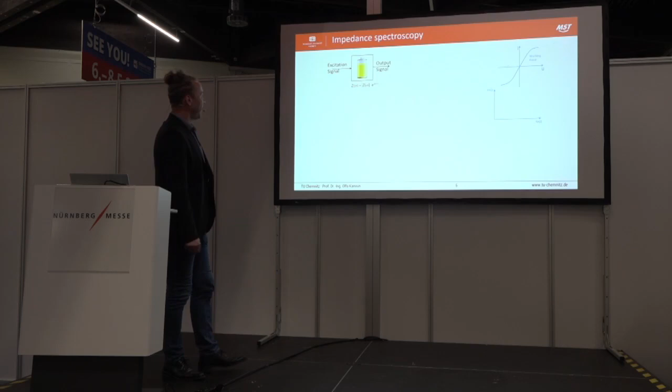So, first of all, so that you get a better picture of what we did, I'd like to explain a little bit the idea of impedance spectroscopy and what embedded impedance spectroscopy means. And now, a short lecture - I apologize.

Impedance spectroscopy means I need an excitation signal, in a standard way a sinusoidal signal. I apply this excitation signal to a device under test - in that case, I choose the battery as the device under test. The excitation signal is applied to the device under test, and I get a certain output signal.

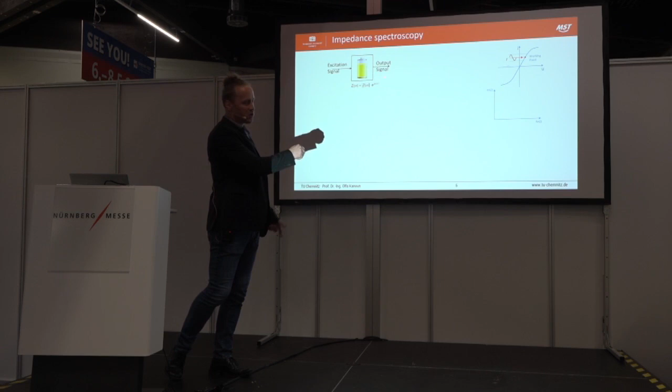Here in the IU curve, you see the excitation signal applied at a certain working point, a state of charge of this battery, and you get a corresponding response, a reaction from your system. This reaction you can calculate to one point in the Nyquist diagram. You see the real part and the imaginary part of impedance, and this is, at the end, one frequency measurement.

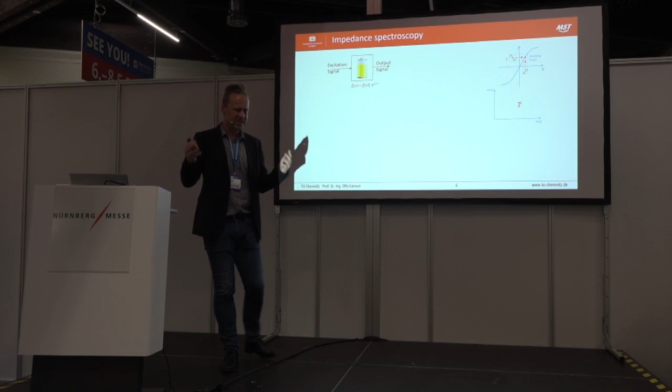This describes almost the state of the art of impedimetric sensors. If you take a look, eddy current sensors, capacitive sensors, ultrasonic sensors - all these sensors almost work with one dedicated frequency. From the point of view of fundamentals of measurement, which we teach to our students, if you use a second frequency, you increase the robustness of your measurement a lot. So like this, we use a lot of frequencies.

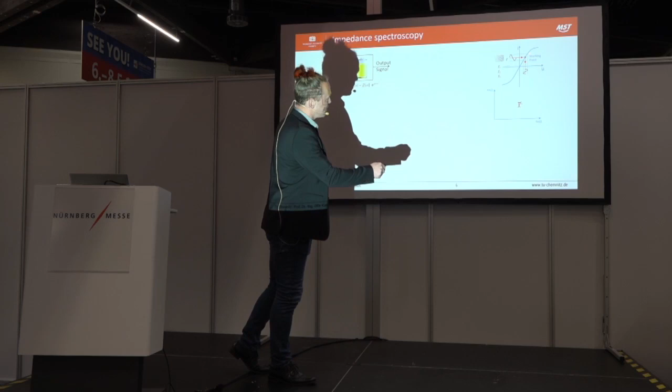You see here a so-called sweep from a low frequency to a higher frequency. We apply a sweep of excitation signal to this working point, and for sure we get also a certain response depending on the behavior of your system. This becomes more clear a little bit further.

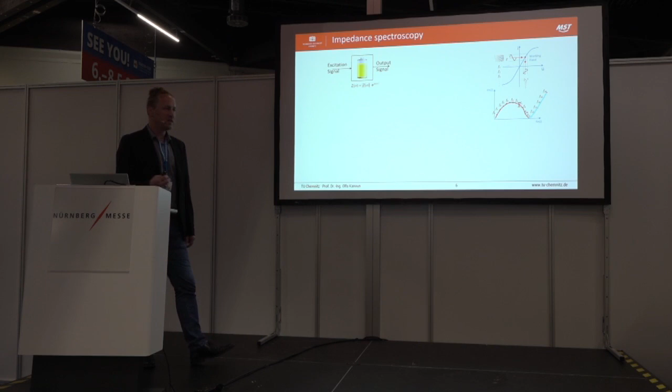Each system has a typical characteristic, and so the problem is to design an adapted excitation signal for a dedicated system to get a characteristic curve like this, for example, for a lithium-ion battery. This is, at the end, also our advantage, our skill in our team. Our idea is to get as good an understanding as possible of what happens, especially in these frequency ranges. I guess later on this aspect will become more clear.

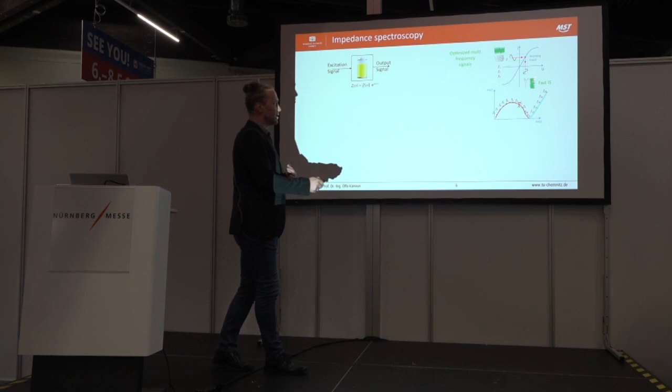If you take a look, you have here now a sweep of a sinusoidal signal. You put one frequency after another, so you have a long measurement time. For fast impedance spectroscopy, there are a lot of opportunities, a lot of approaches to reduce the measurement time. Here, only one example: multi-sine. You see here two periods of the smallest frequency, the longest period duration, and we put all the other frequencies into this time window. We apply, at the end, a multi-sine signal, and it is possible, using signal processing, to analyze each frequency point separately.

The advantages: it is a non-invasive approach. We apply this for resistive, capacitive, or even inductive solutions, sensor principles. Another benefit is the separation of effects in specific frequency ranges.

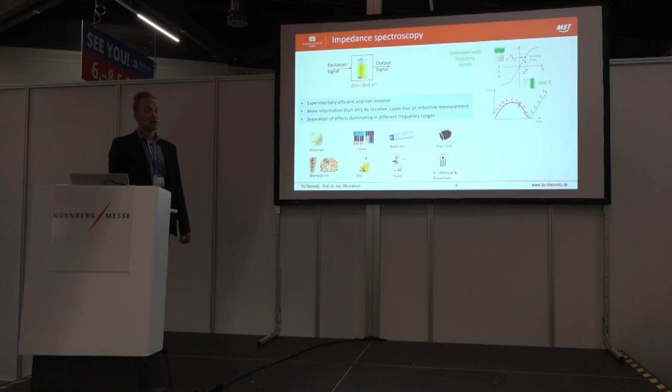A collection of our approaches: we were able to characterize materials like metals. Therefore, we are using almost inductive sensors, eddy current sensors - we call it inductive spectroscopy. We developed an approach for cable diagnosis, as well-known also for batteries and fuel cells. For biomedicine, we developed approaches in the food branch, oil or milk, where we apply capacitive spectroscopy. At the end, we use capacitive sensors, applying multispectral excitation to get more information out of the system, out of the measurement, in comparison to state of the art. The idea is to get this principle, this technique, into an embedded system for a stable, affordable, embedded impedance spectroscopy.

But what does it mean, understanding of impedance spectra? You see here once again, qualitatively, this curve, this Nyquist diagram from the slide before. This is a typical shape, qualitative, and we start here in this part in the range of millihertz.

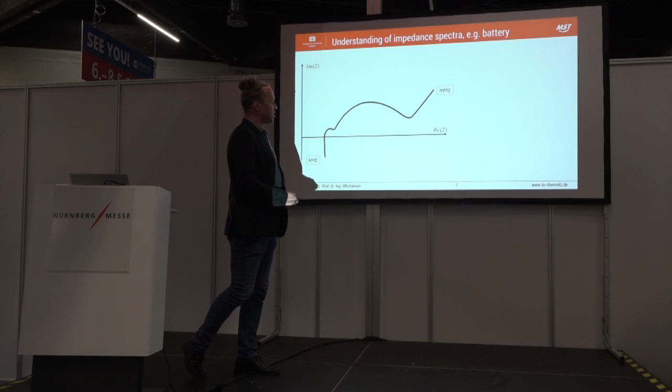Batteries - this is an electrochemical system. The effects, the phenomena, are slow. You have ionic charge transfer. That's why you need low frequencies to analyze this range, these phenomena.

We start here - this is a so-called RS point, the shift of the real part. This is not so very important, but it is an important method in the state of the art for battery diagnosis, the 1kHz method. But honestly spoken, without any real sense.

So we have here this diffusion part, as I said. This is coming from the electrochemistry field, well described in this area. We use this information to model this area, where we describe almost electrochemical phenomena, electrochemical aspects in the battery.

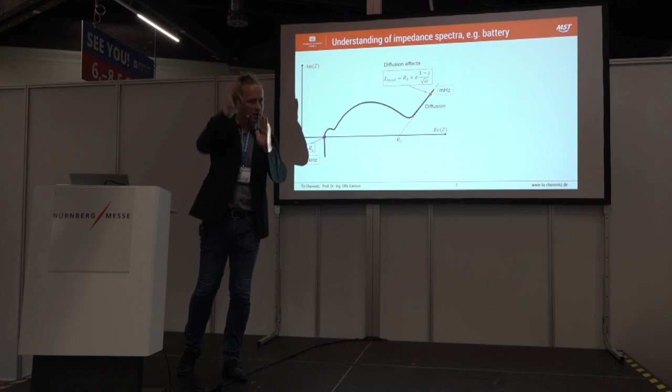You need to understand, we have this excitation signal, a low frequency. At the end, it's a polarization of the molecules from the electrolyte. But the electrolyte molecules are very huge, and if you increase the frequency, the heavy weight of these molecules is too much for them to follow anymore the polarization, the excitation. That's why this phenomenon drops out of the contribution to the measured signal. And this is this point.

From this point, another phenomenon becomes obvious. You see here in this area there is a semicircle present, and this describes almost the characteristic of electrode 2. In this area, there's also the so-called charge transfer reaction active.

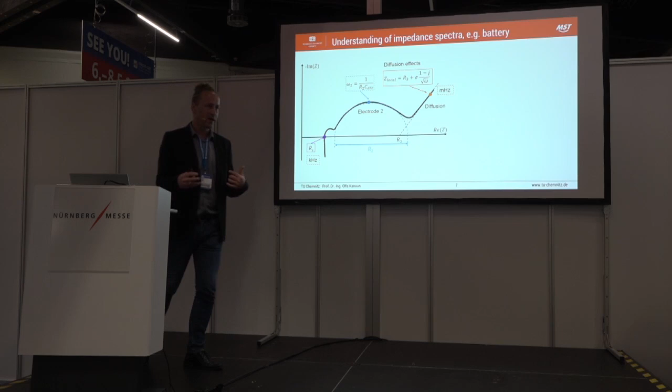I continue. There is a small semicircle. This is electrode 1. Also, delamination phenomena can be monitored in this area. And then there is a small inductive area up to a small kilohertz range.

This inductive part is almost important for fast charging aspects. If you like to design a battery management system for such purposes, it is important to know the inductance of your system.

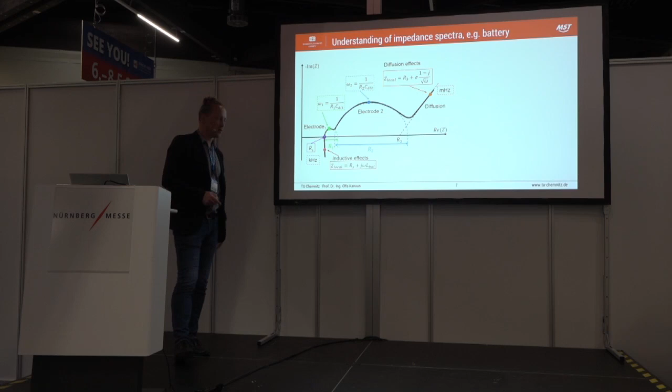Our idea is to get real measurements, to get understanding of the working phenomena in this area, and to organize a certain modeling in such fields.

Generally, we can distinguish between two modes. I divide a qualitative understanding - it's at the end, it changes from a certain state. If you have, for example, a good example in your production, you measure a curve, and this is your best pattern. And then, if you continue in the production and you have any kind of a failure in your system, you have a change in this shape. And this is, in our talk, a qualitative mode.

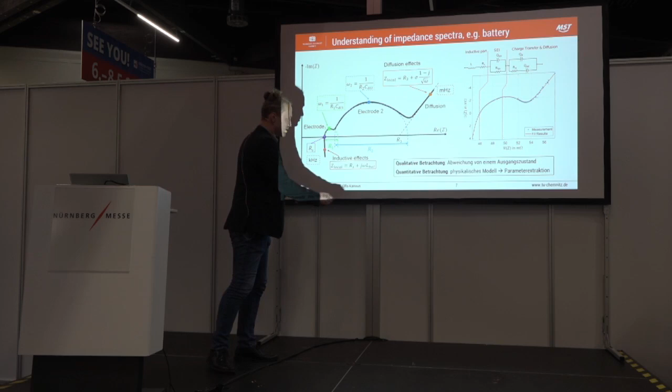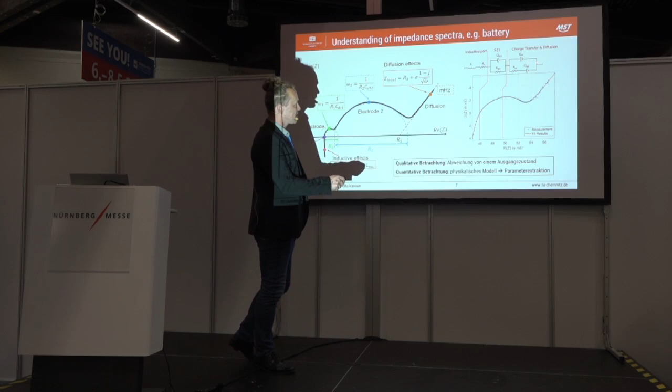A quantitative mode needs a little bit more effort in the lab. We need a better understanding, and we need to generate a certain electrochemical, physical model which describes this characteristic. And if we have such a model, then it is possible to extract really physical aspects or phenomena which we are changing in the procedure. But I guess you will understand later a bit more.

This is a very important diagram for our team. You see here an x-axis, this is a frequency range. You see the decades, 10⁻⁴ up to 10⁶. And here you see the impedance range from also 10⁻⁴ to 10⁶. This is almost a range of practical applications, and you see here the field for batteries, for example.

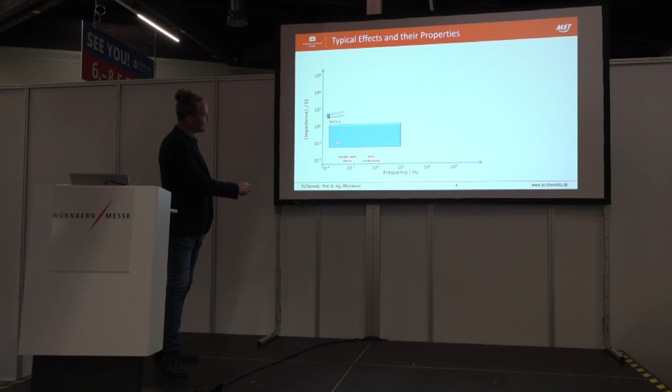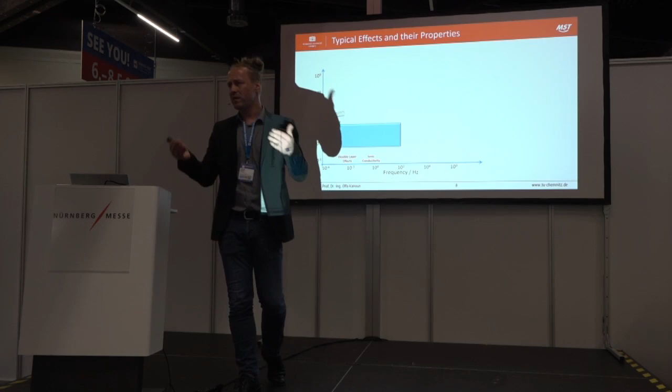You have a range from 10⁻⁴ up to 10³, so you have a small kilohertz range where we test the battery systems, and you get output impedances in the range up to ohms. As you know, lithium-ion batteries have an inner resistance of some milliohms, and we don't need a system with a resolution of kiloohms. Does not make sense.

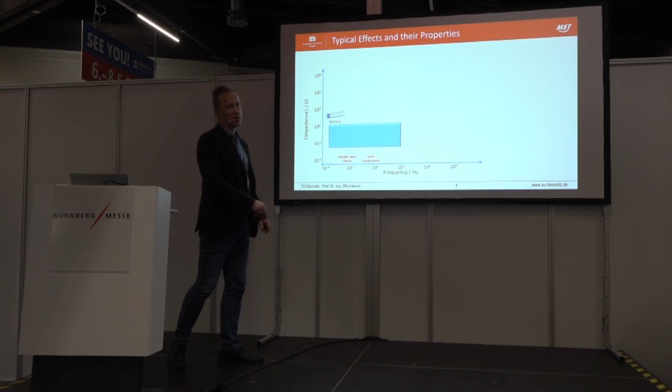So, which effects are working? We have here double layer effects in the region 10⁻³, and we have ionic conductivity in the range of hertz. So this is only an example, I don't like to continue with each phenomenon.

This is our magic diagram, and each application we put always here into this field. Let me make it short: we have here effects, we have here our coil structures, the inductive spectroscopy in this range.

Here we are using the eddy current effect or the Maxwell-Wagner effect. In the range of 10⁷, we have almost active water molecules. If you have, for example, absorption of water in polymers, in wood, in whatever, then we need a test in the field of 10⁷.

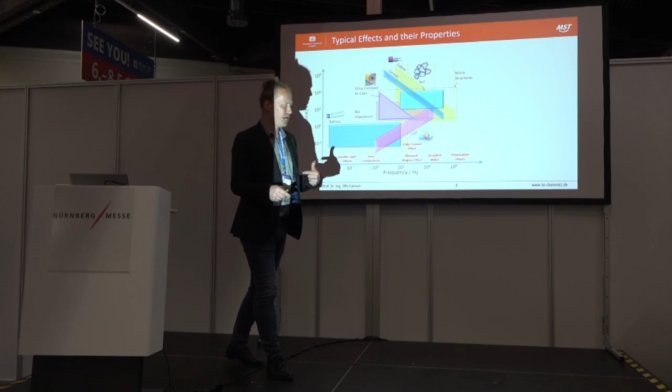So here in this area, microstructures, 10⁹ polarization effects - this is something we are currently more concentrated on. Our idea is to identify polymer types, and there we need to go down into the molecular level, and there we use polarization effects from polymer molecules, and there we need to go up to the gigahertz range.

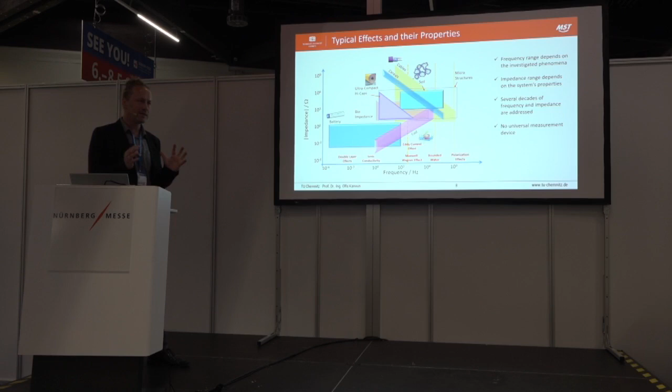So here you got a clue what it means to have frequency-dependent effects or phenomena. These are very important for us. At the end, our strength or our idea is always to make an impedance measurement and to get a certain understanding of what happened, so the idea is to get a physical or electrochemical model.

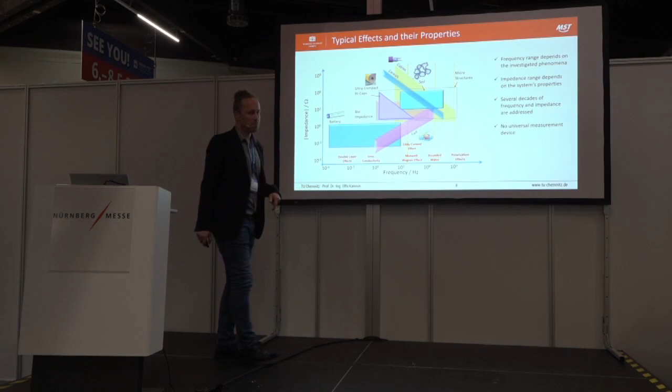And for sure, to make the story short, no universal measurement device is able to cover this complete range. This is too much for one approach, and this is also a challenge we are faced with. As I said, for us, embedded system design is important, and therefore you need to keep this part in your mind.

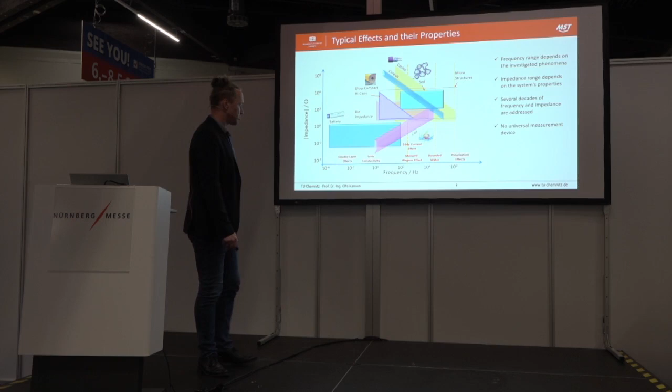Once again, impedance spectroscopy in the lab - this is something you can go in a shop and buy devices. Keysight, you can take 60, 70 kilo euros, 70,000 euros, and you can buy an impedance analyzer. But I'm sure you don't want to put this device in your production line.

A next step is National Instruments hardware. It's possible to apply impedance spectroscopy also with such components. You can use the parts, the components - you can do it, it's possible.

But at least if you need to multiply and need the second and third license, this also is not so funny. That's why the solution is we need to develop embedded solutions: small circuits, cheap, robust, and fully automated.

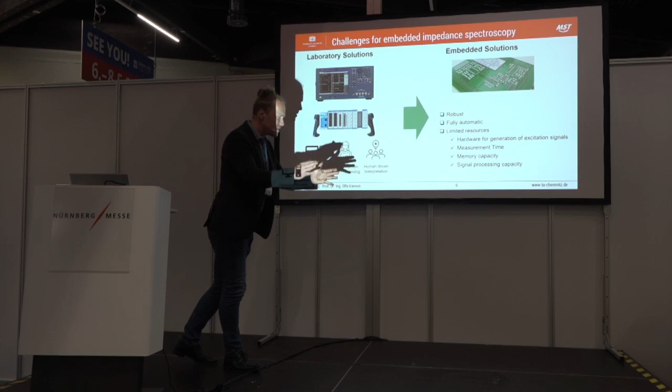But I need to say, limited resources. Yeah, you always have limited resources, you don't have the full performance. But do you need it? You need to take a look into your production process and identify the important points. Then you can reduce your measurements to only a small frequency range, or even just some frequency points, to get sufficient information from the procedure in the embedded approach.

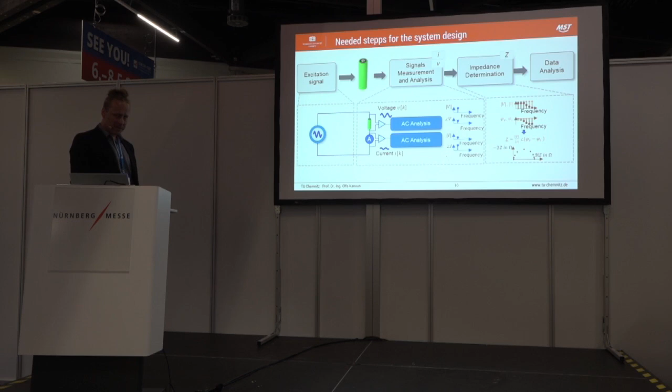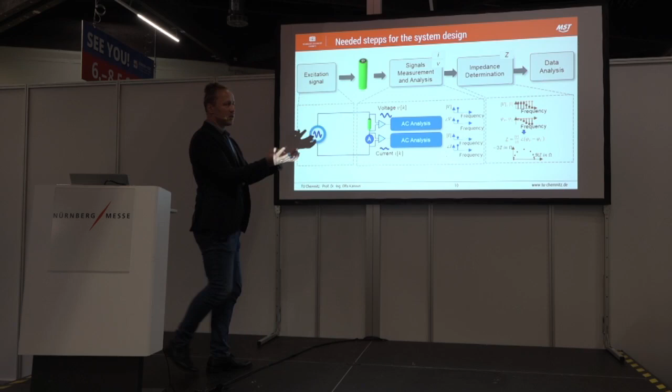And this is, at the end, a final overview from theory. What does it mean at the end? Impedance spectroscopy is a complete story. You need a dedicated, synthesized excitation signal for your particular approach. You need to measure the voltage and current signals, and this is important in phase - you cannot measure sequentially with a multiplexer. It is possible, but you have problems with the phase at the end in the analysis. You need the impedance determination, and these parts are almost combined in the embedded system, while the data analysis should be done somewhere in a cloud, or wherever, in an addition part upstairs.

Let me say it in that way. So now I come to this - I call it philosophy - to get a better picture from your manufacturing processes.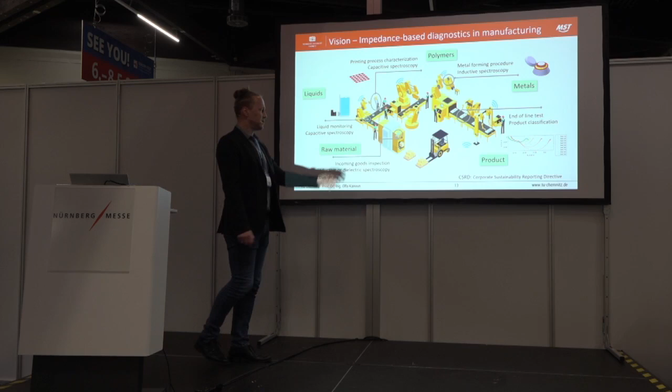We're going stepwise: characterization of raw materials and incoming goods. What does it mean, how does it work until now? You are a company, you need a certain supplier chain. You go to your supplier and say, I need a product, XY, this is my specification. Can you deliver? Yes or no. If yes, everything is fine. If no, then you go to the next. So you have a quite tight band of tolerances for your incoming goods.

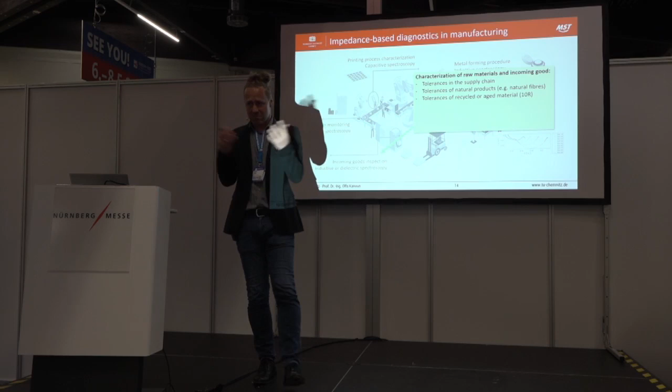But what will come soon? You have tolerances in the supplier chain because of availability. You know the complications in global infrastructure - you need to go to a different supplier, and they cannot give you the same tolerances. What do you do? Do you stop your production or adjust your processes? You have tolerances in the supplier chain, and also tolerances because of the idea to use natural products. If you like to substitute your polymer with, for example, natural fibers, you won't have these stable parameters anymore.

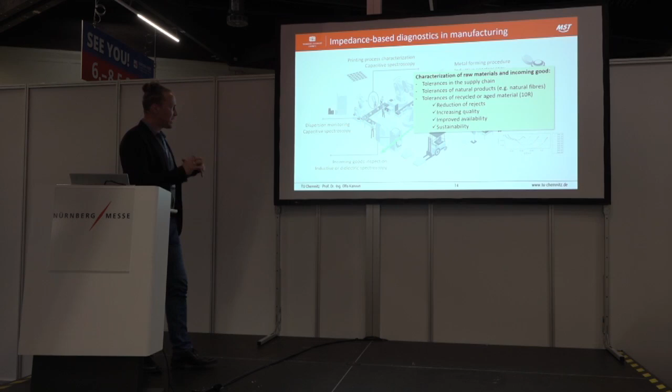This is sure. And also the question of recycling - you get much more problems because of aged, or still-in-use aged, material. There are a lot of investigations in that field, but this will come soon. To increase sustainability, reduction of rejects - these are the questions. Increase of quality, or keeping the quality of your products. Improved availability - this is almost the story with the supplier chain, if you don't have the need to go to only one supplier. At the end, all these aspects help to increase the sustainability at the input of your production.

In that case, let me place an example from our research. I want to continue here: dispersion monitoring, capacitive spectroscopy. If you are dealing with liquids, as you remember my diagram, we were dealing almost with capacitive spectroscopy. What can we do? We can, for sure, measure filling level, but we can also characterize liquids.

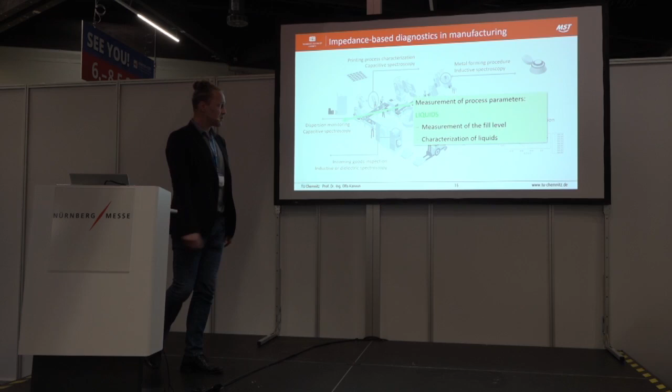We have a team also developing soft sensors, published in 2022. We try to organize dispersions, including nanoparticles. Here you see almost the biggest problem: you have the CNT, the carbon nanotube for example, and it likes to stick - there are van der Waals forces. That's why this material likes to conglomerate, as shown here. But this is an unwanted problem for the production of, or for whatever you want to do with, this polymer.

Some aspects are quite fundamental, but we do soft sensors here. You can see our startup in Hall 1.

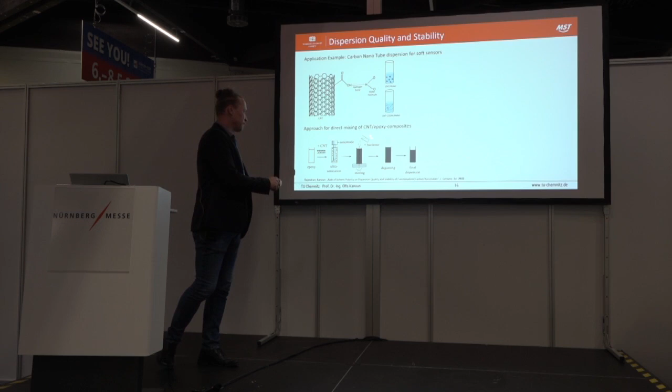Here you can see the mixing process in an epoxy dispersion. We bring epoxy into a solvent, we have a dispersion, and we mix it with carbon nanotubes. If you put it in first, it looks like this: you have sedimentation, different phases, no homogeneous dispersion. We need some time to develop procedures for different polymer types, always dedicated procedures including ultrasonication, stirring, and heating to unbundle the CNTs.

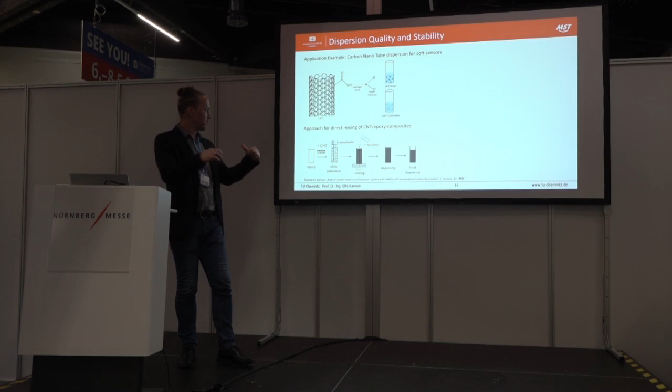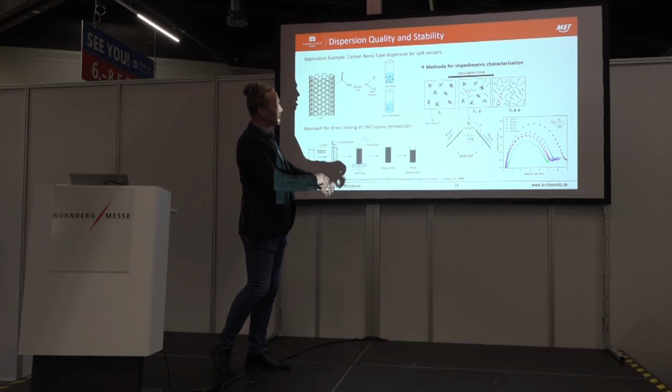So what does it mean? We have here the conglomerates, and by sonication time we get an unbundling of the CNTs. The final goal is a homogeneous distribution of the CNTs in the dispersion. The problem is, if you continue with sonication, the CNT breaks, and this is an unwanted phenomenon if the CNTs become shortened. We want the CNTs in their original length.

So we are able to monitor this with impedance spectroscopy. You can see here a corresponding model. This is a procedure we understand well, ready for industrialization. As I said, published in 2022, and we have a startup here in Hall 1.

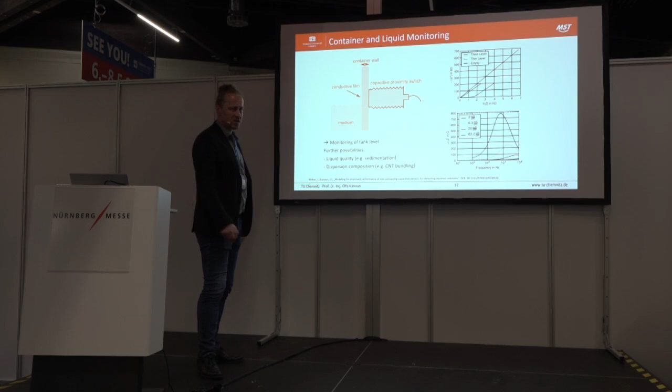Further possibilities include liquid quality monitoring, as I said. Let's think about the production process: you have your production line, and a tank with ink or glue, for example. You don't need a lot in your process, and this tank sits there for one week or one month. Maybe you have sedimentation, drying procedures, and so on. We can support this by observing it with impedance spectroscopy to make the procedure more stable.

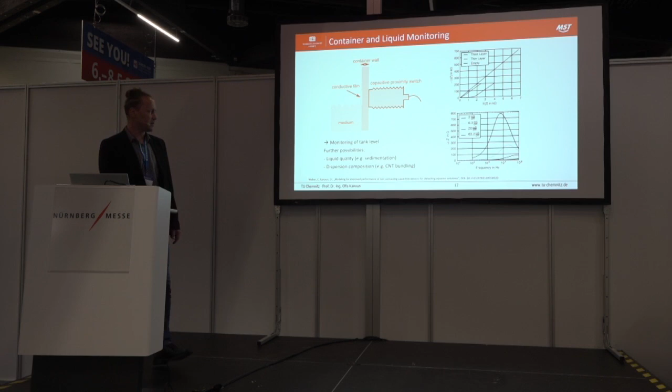Coming to the next stage, polymers. In the field of polymers we also use impedance spectroscopy. What does it mean? Here I choose an example from a production process of printed batteries. You have a pattern printing process, a huge substrate with multiple pads printed in a matrix, in sequence. You have a first printing process, and after a while, after a drying procedure, after evaporation or formation, you have a second procedure.

I am sure that still in the first step, the quality of the final product will be defined. And I am sure you have in this matrix one or two or three parts which are rejects from the beginning, from the first procedure.

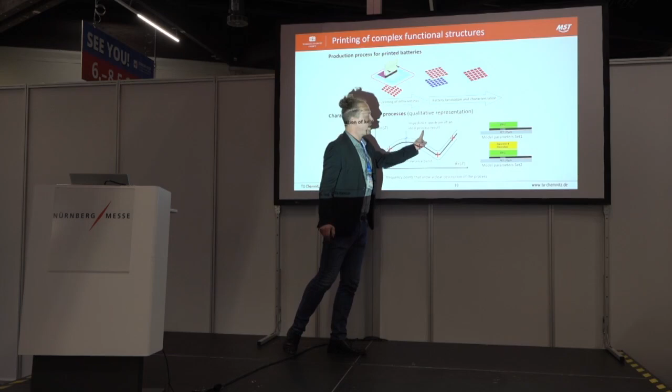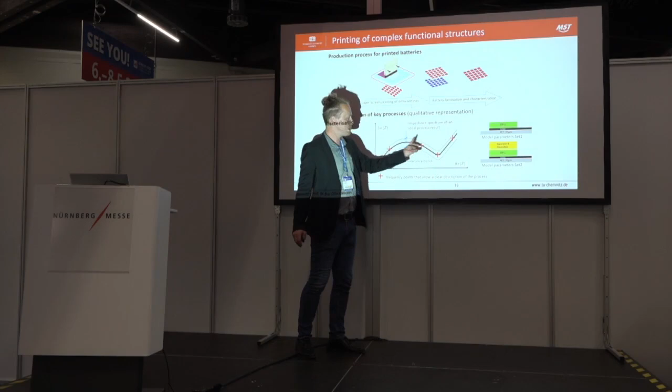What you can see here is only a qualitative drawing, the pattern of the battery diagram. You can measure in the lab the spectra of an ideal process result. You get from the company an ideal process result, you make the impedance measurement, you have this in your system, and you have a model parameter set 1 for the first layer.

So how it works at the end is not yet clear, whether this is included in the nozzle from the printing head, or if it is something like a mask which you put on it after the printing procedure. This is not yet clear; it depends on the application.

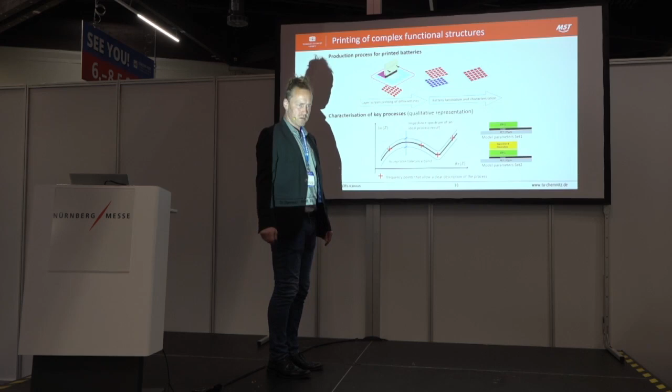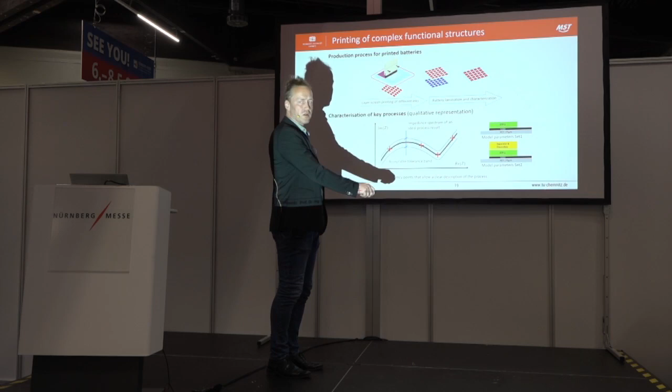What is also possible? After a while you have a second printing procedure. You take the same application, the same sensor system, the embedded system for impedance spectroscopy, the same front end, a capacitive structure, and you select in the microcontroller only the second model set for this double layer structure. For sure, this double layer structure you characterize in the same way in the lab before, so you are able to analyze.

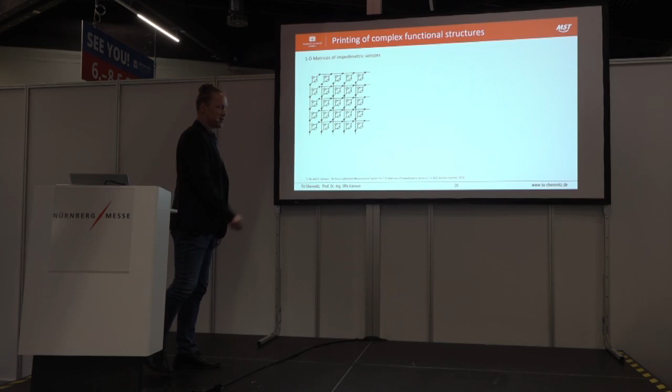I don't want to do that with each step, but with the key steps, the important ones. At the end, we have such a matrix. It is published in 2024. We are able to analyze impedimetric matrix systems. I don't want to come in detail here, but we can do that.

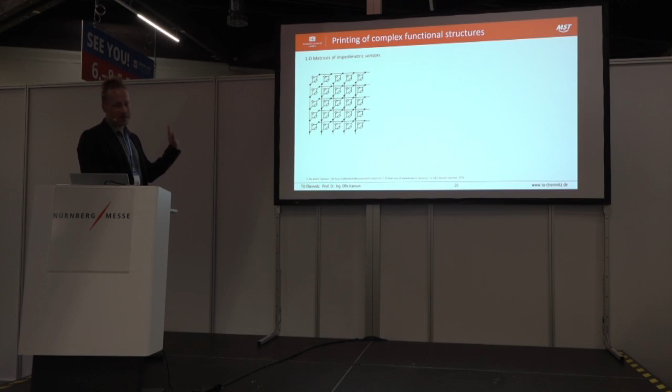What is the idea? We have here our impedance-based measurement. We are able to measure each of this matrix element in a way that we can say, okay, this and this is okay, and the fourth in this line has any kind of a problem. And my system maybe can adjust process parameters. Maybe here you see the yellow arc, it's maybe in the range of the tolerance band. So here you can adjust the parameters, and this you exclude from the further production steps.

Embedded systems for impedance measurement in matrix structures. We start in this year with a project. We develop this with a company doing printed batteries in our town.

Okay, what else can we do? Identification of percolation threshold by impedance spectroscopy. So here you see, for example, a micro image of the polymer with CNTs, and the percolation is at the end a conductive path through this structure. In that case, it's a PEDOT:PSS polymer substrate.

So here you see first a diagram, the dependency of the conductivity depends on the concentration of the CNTs. And what you can see here is a characterization of the forming procedure. We have the printing, and afterwards, in the drying procedure, the forming of the structure, followed by impedance spectroscopy. So we can measure, okay...

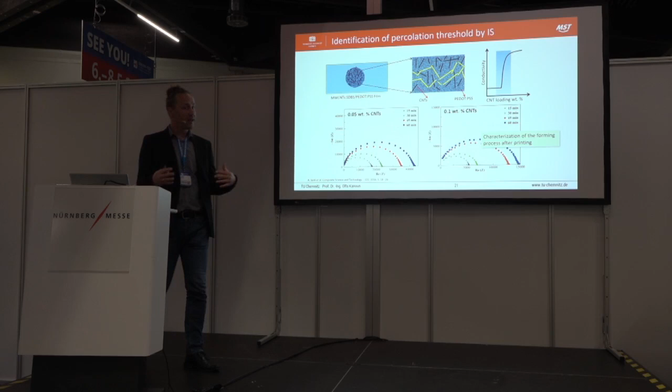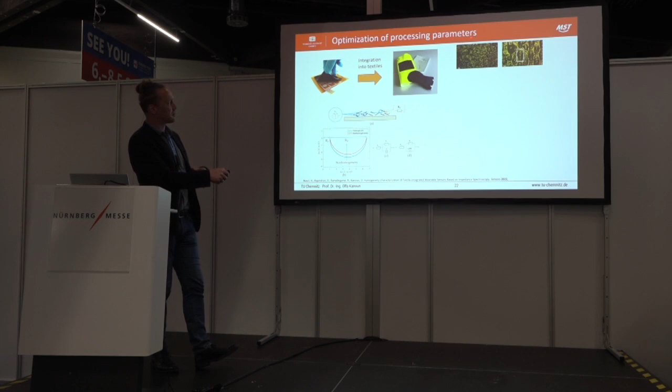Further optimization criteria. We have here our sensor main structure, and we have here application, additional textile, whatever, and we try to apply directly our ink. And here you see the result if we have a slow squeegee speed and a fast squeegee speed. The speed of the squeegee causes the quality of the homogeneity of the result at the end. And for sure, you don't like this, you want this.

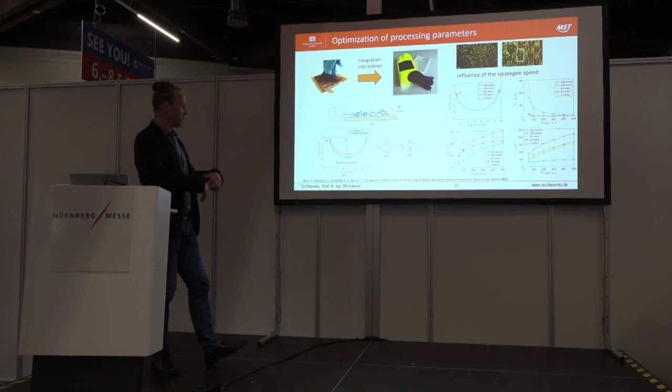As I said, we try to understand always the story. We try to organize corresponding models for later automation procedures. And here are some diagrams. I don't want to come in detail. You can read, if you like, published 2022.

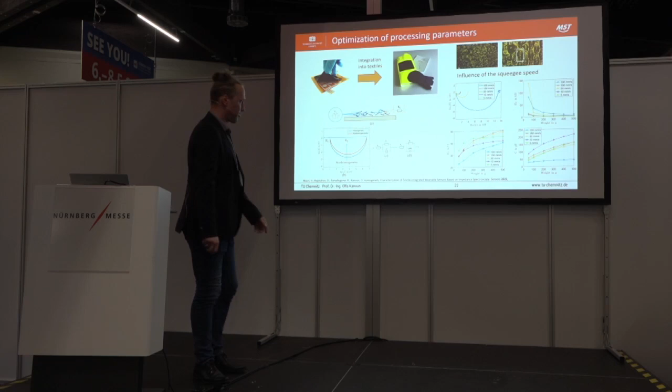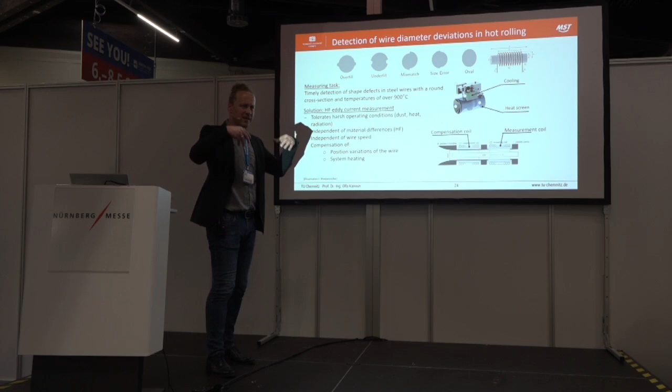First of all, I want to start with a PhD running in our team in the detection of wire diameter deviations in hot rolling. This is a crazy technique if you see it with your own eyes. This is a harsh environment. These are great factories. You have dust, you have humidity, you have heat, and you have a rod which is rolling hundreds of meters per second.

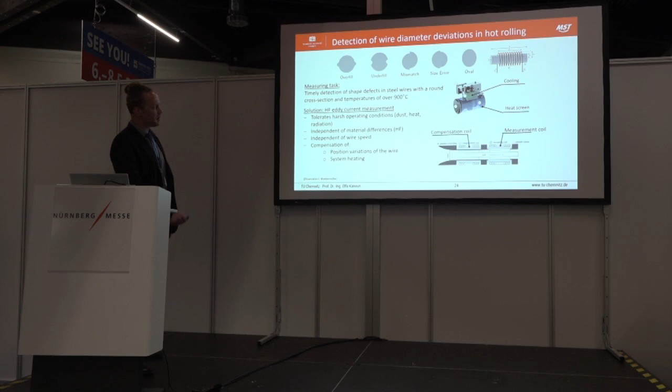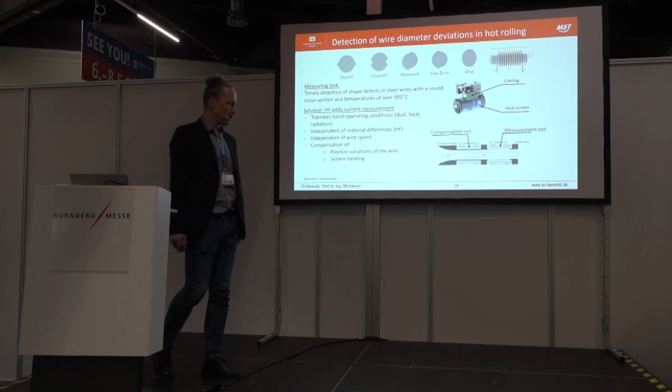In that case, we apply also a coil, an inductive approach, working by over 900 degrees. So here's also a cooling system included, and we are able to identify such shapes. So we were detecting simply the shape structure of this rod, and what you can see here were examples for failures causing from process parameters in the process. Yeah, if you like, you can read in a dissertation from our team.

Next step, these are ongoing research investigations. You see here a cold forming procedure. You see a part, a metal part, a tool, and you see here cold forming. What does it mean? You have localized a lot of stress, you have localized a lot of heat, and you want to know what happened.

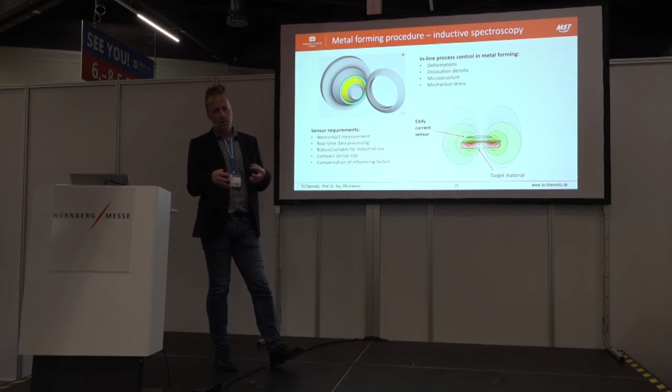And here we developed also inductive sensor approaches, contactless, in real time, very much robust in a compact size, and it's very interesting. We use the eddy current effect. We have a coil. The coil organizes a magnetic flux, a magnetic field, which is going into a target material. And here we use also this, as I said, approach with multispectral information. A lower frequency causes an eddy current, which is going deep in the substrate in the target material. A higher frequency is only scratching at the top, the so-called skin effect.

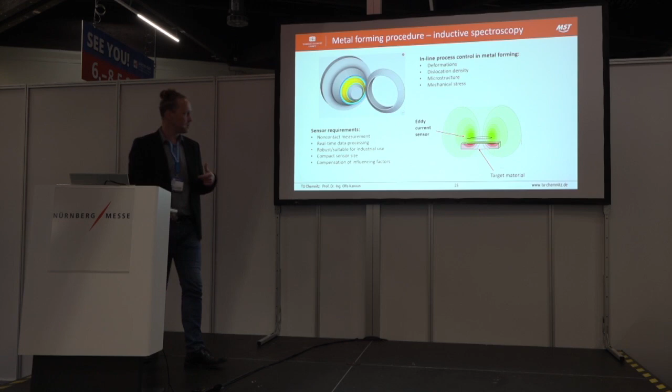Yeah, as I show here, you have in that case only the primary coil in use, but for anisotropy measurements, you also use the sensors, the coils in the surrounding of the structure.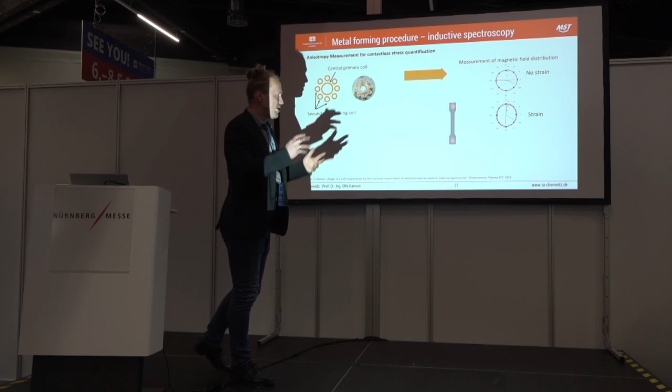What does it mean? This is a strain measurement, a contactless strain measurement of any kind of metal target material. So you can measure tools in operation, you can measure whatever strain in a material.

To make the story short, we can detect changes in the permeability of the material, and all aspects which cause a change of the permeability, we can detect. This is, for example, strain, temperature, also grain growth. If you do hardening, for example, you get bigger grains causing a change in the permeability.

We can measure with our sensors the depth of a hardening procedure, for example, without destroying it. And also the relief, the surface, we can observe.

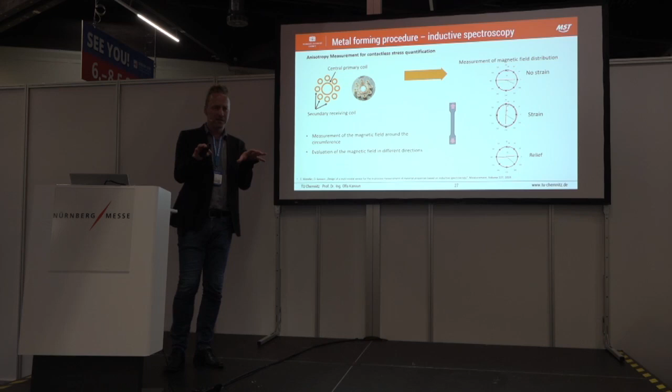One aspect from the lab: in the past we had measurements where we were observing a soldering procedure, and this was such a harsh environment our laptops dropped down, but the sensors were working properly.

What is also interesting with this principle of multiple sensing is that we are able to identify unwanted or external influencing parameters. So here, for example, you have tilting - this is always a problem with inductive sensors. What about the positioning or orientation of the sensors? We can detect tilting, and this is also quite interesting. We can measure anisotropies, and that is a gradient, a movement.

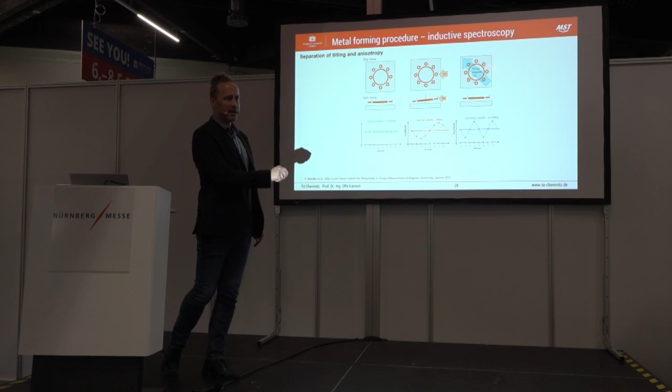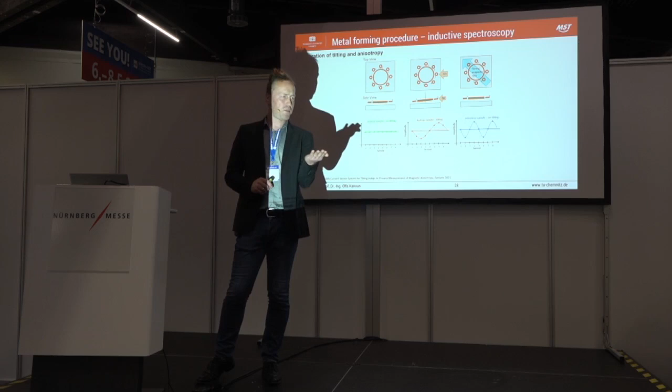One example from practice: take a look at the development of pouch cells. For research, it is very interesting to understand or know how the current is distributed in a pouch cell - this is very important information for them. With this sensor, we can detect where the current is flowing in a pouch cell.

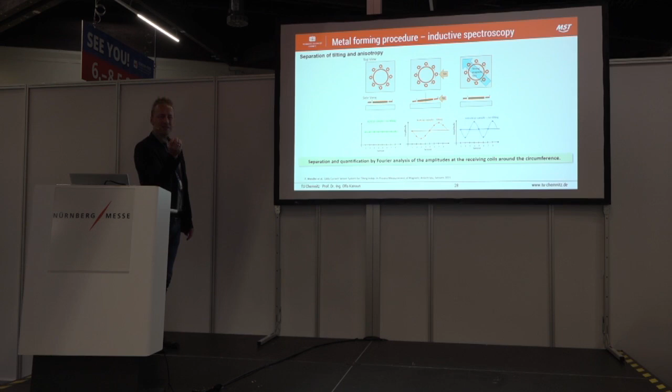By the way, separation and quantification by Fourier analysis. Once again, we are working here also with a multispectral, dedicated synthetic multispectral excitation.

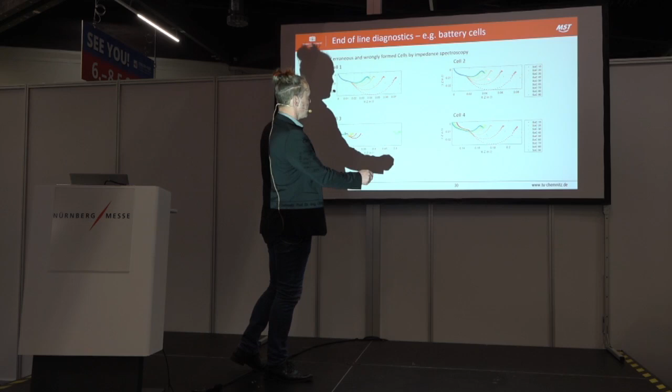So, end of line testing. I like to always use the battery as my device under test. Here you can see such a comparison study of 4 different cells. To explain this measurement, you see here the 9 different stages of the SOC of a battery.

And in each stage, we made the impedance spectra of the cell. You see the typical increase of the curve by charging. So, what do we face, and why do I put this slide here? You see in cell 3, we had a phenomenon.

Exactly at SOC 70%, the impedance spectra run away. If you look here, 0.5 ohms, real part - easy, no point, yeah? But you need to understand that 70% SOC will really be used in practice. Batteries in practice will be used only in a small range, but 70% is in that range. So if you have this phenomenon at maybe 20 or 30%, it doesn't matter, but at 70% it will be used.

That means the real part doubles. That means the heat losses double. So you have in your stack a source for a hotspot.

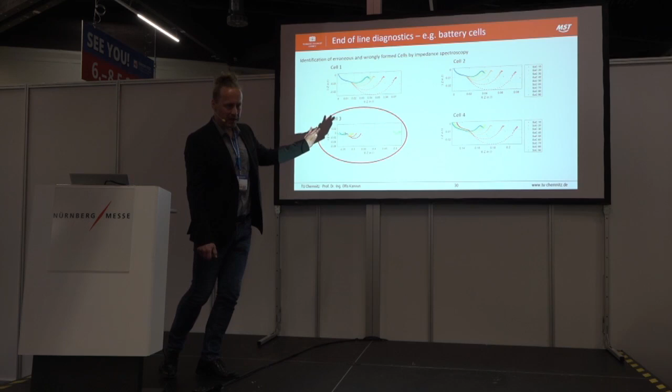So, we went a little bit deeper, and we found that in this cell - these were new cells from the market - the forming procedure was not yet done completely. After a while and after some cycles, this part decreased a lot. But once again, this is an example to show how impedance spectroscopy can help improve your processes.

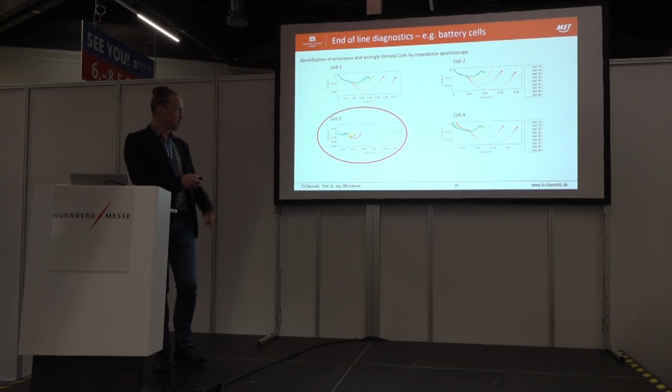And here at a complete system - impedance spectroscopy in the field of batteries, we did for almost all battery types, for all chemistries. You see here naturally also a change in the shape. You need, for all the batteries, for the different types, different models. But this is, at the end, our homework we did always to get the understanding and the physical model of your cells.

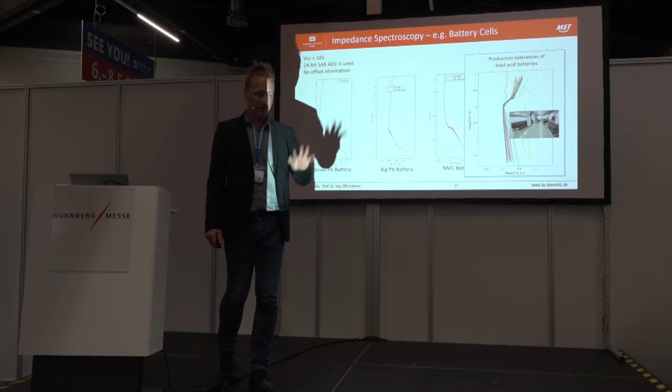I also have here lead acid batteries, and I am totally convinced that this type of battery will follow us for the next decades as well, even if the European Commission doesn't like them, because of this high quality factor right now in production, and also the reuse of lead acid batteries - it is really a system we will need in the next years also for the energy turnaround which is going on.

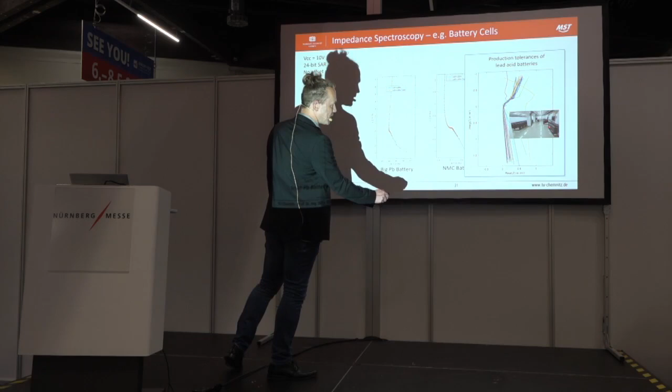Here we have a comparison study from our USV system at our university to get a better understanding of what happened with the cells. Here you see a string of batteries, and we face really that the corner batteries get more charge with disturbances from outside, from the converters, from the rectifiers. We face bigger changes in the characteristics at the corners of such a stack.

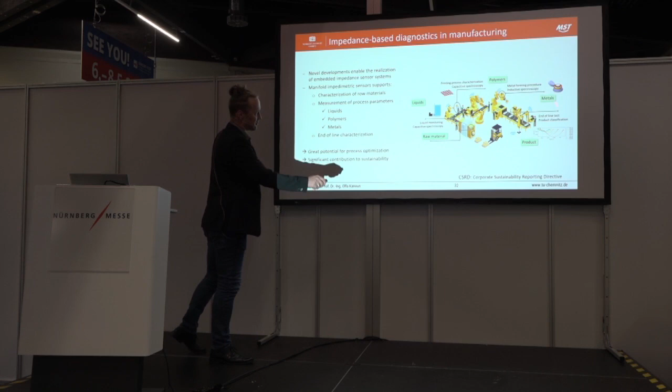Okay, now I am almost at the end. You see here once again such a complete line. Totally missing are our approaches in the field of bio and medicine, food and agriculture, and environment. I was focusing only on the manufacturing procedure, but I guess you got a good impression of liquids, polymers and metals, how impedance can help to increase sustainability in such processes.

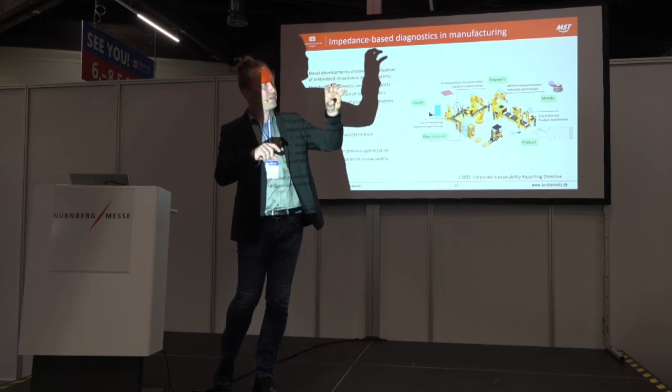We need at the end an embedded system in a certain frequency and impedance range, a certain front end, to get the interface between this measurement and the real world.